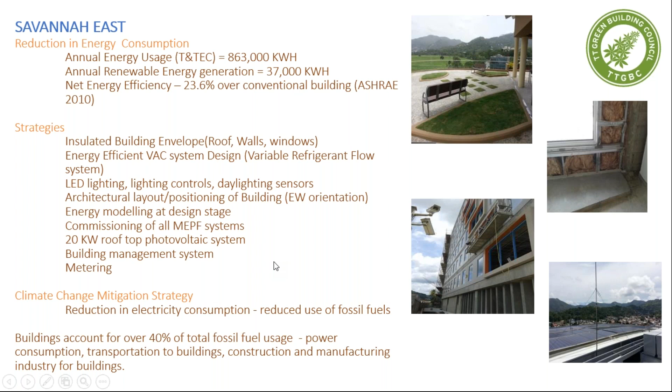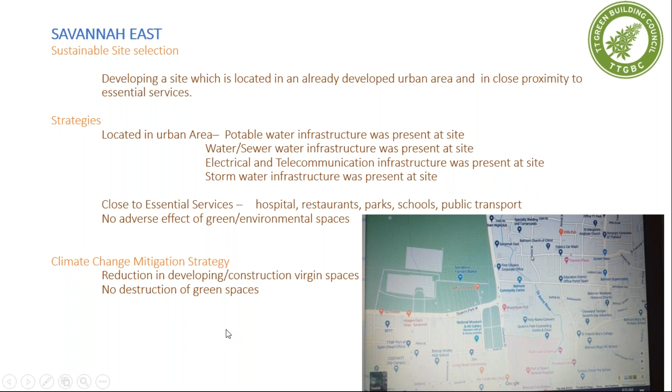That's a common misconception people have about green building.

I touched on transportation on the sustainable site. Savannah East is located in an urban area, in close proximity to existing transport systems. If you look at the map, you'll see how close Savannah East is to all the transportation hubs. There are actually bus stops on both sides of Savannah East, which facilitate easy access to the public transportation system.

We have preferred parking in the building, so people who carpool or have hybrid or electric vehicles park closer to the entrance of the building. You'll notice the parking that's above ground is open grid paving. There are also some car lifts, which encourage utilizing the building footprint without increasing gross square footage.

The climate change mitigation strategy again is a reduction in emissions associated with transportation.

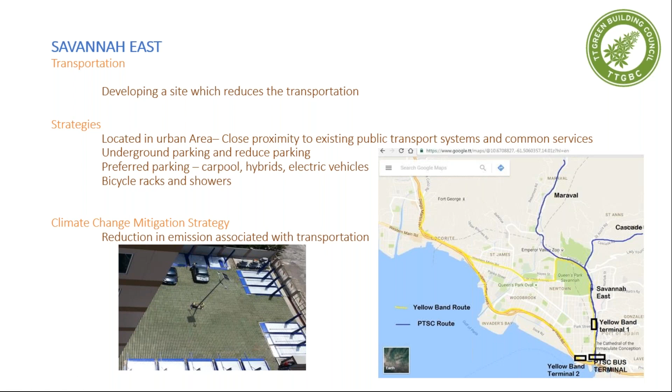On the building itself, we utilize sustainable materials and practice recycling. We source materials from sustainable sites, and we recycle construction material and building operation waste. Our strategy for sustainable material was to source wooden materials from FSC certified products. FSC certified is Forest Stewardship Council, which is basically certified sustainable forest. Sustainable forest means forest that is replanted every 15 years. The trees mature within 10 to 15 years, so after you remove the trees, you replant, and in 15 years' time you'll have mature trees to reap.

Regional materials were sourced, so the carbon footprint associated with imported materials was significantly reduced. Plenty of materials had recycled content. For example, steel usually has 70 to 90% recycled content. Wood, certain desks, and steel keys had recycled content in them. And during construction, we recycle. Again, I mentioned building operational waste.

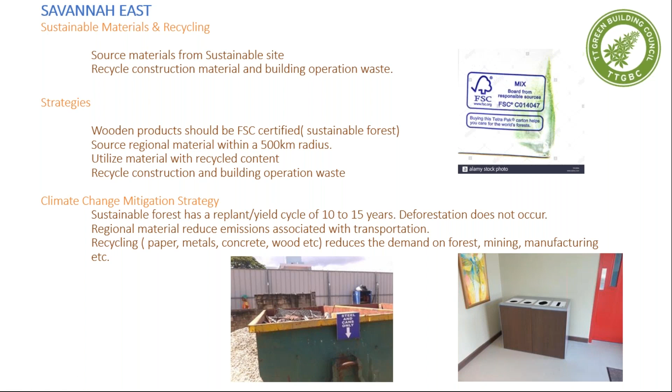Obviously, the climate change mitigation strategy is that with sustainable forest, which gives you mature plants in 15 years, and then you replant, deforestation on sustainable forests does not occur. With regional materials, we reduce emissions associated with transportation of materials to the site. Recycling during construction and operation of the building, with items such as paper, metals, concrete, and wood, reduces the demand on virgin forests, virgin landscape, mining, and the manufacturing of new materials. A lot of energy is associated with extraction and processing of raw materials and resources, so when you utilize sustainable materials, you reduce all the carbon footprint associated with those extractions.

So that's a brief on Savannah East, which is a green building in Trinidad, and the strategies that we utilized and how it contributes towards climate change mitigation.

So where are we in Trinidad? With regards to green buildings, there are two certified green buildings in Trinidad. One is Savannah East, which I gave a brief description of, and the next one is the NIB building, which is in fact maybe like four buildings before Savannah East. The state had issued some tenders for green buildings, but due to the status of the economy, none of the projects went forward to date.

But we must take note that a lot of buildings in Trinidad do utilize sustainable strategies with energy efficient equipment. They have a lot of daylighting sensors, and they utilize LEDs, which is pretty common with new construction. So although we don't have many certified green buildings, there are a lot of buildings that practice green strategies, and TTGBC applauds all those buildings for those strategies.

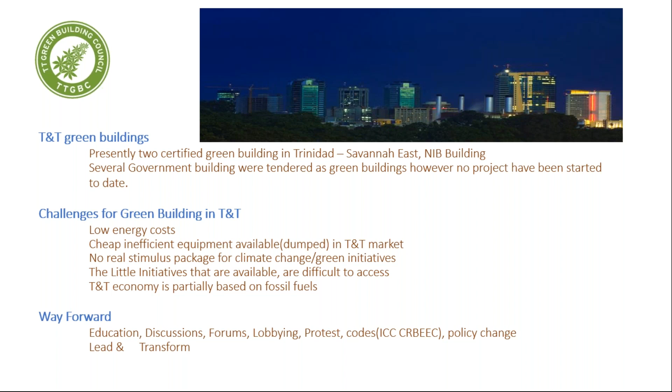What are the challenges for green building in Trinidad? We all know the low energy costs associated with provision of power in Trinidad. We have a lot of cheap, inefficient equipment in the Trinidad and Tobago market because it's not acceptable in the first world. In Trinidad, there's no real stimulus package for climate change or green initiatives, and the little initiatives that are available are very difficult to access.

A couple of years ago, a colleague of mine brought down a container filled with solar water heaters. However, customs was not up to date with the incentives. He spent two weeks on the port, accumulated a huge amount of storage fees, and he had to effectively reroute the container to Guyana in order to not lose more money.

The basic thing in Trinidad is that Trinidad's economy is based on fossil fuels, so it's kind of hard and difficult to move away from it. But the way forward is by reducing the demand for fossil fuels, and that's what green building does.

Once the demand is not there, and we seek alternative ways to fossil fuels, we will slowly get there in order to try to mitigate against climate change. The way forward is education, discussions, forums, lobbying, some protests,

following codes. I know my colleague, Ms. Andia, who's the next speaker, will mention the CARICOM Regional Energy Efficiency Building Code. They need some policy change in Trinidad, and what each and every one of us has to do is lead and try to transform society to think more about climate change and learn to do development that will have little or no effect on the environment.

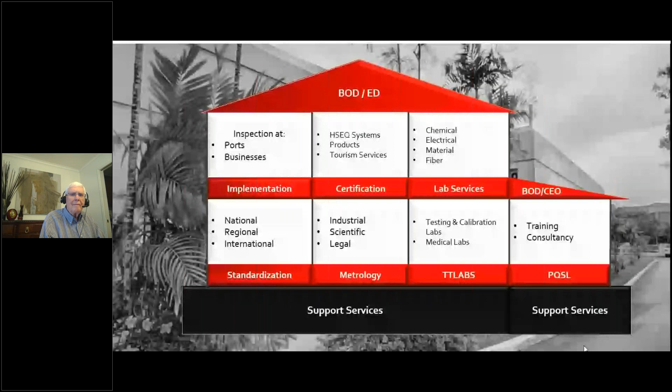Regionally, our counterpart is the CARICOM Regional Organization for Standards and Quality, CROSQ. This is what I like to consider sort of the UN of national standards bodies in the CARICOM region. Similarly to how TTBS is the national standards body of Trinidad and Tobago, each CARICOM member state also has a national standards body.

And what we do is come collectively at CROSQ to move forward regional standards and regional quality initiatives. This is held by CROSQ.

Okay, getting a bit of background, let's start to talk about standards. A standard, as defined by ISO, the International Organization for Standardization, is a document established by consensus, approved by a recognized body, that provides for common and repeated use rules, guidelines, and characteristics for products, materials, processes, services, or systems.

So it's important to note that standards can function for both tangible and intangible products. That's why we often say products and services are interchangeable for standards, because we're able to define requirements for both of them. Notably, one of the things you see is a document established by consensus.

So I have a colleague at the British Standards Institution, BSI, who often describes standards development as magic, because it's really an avenue where you have regulators, industry players, and consumer advocates all coming together collectively and deciding requirements, the minimum acceptable requirements for a product to make it safe and have minimum performance abilities.

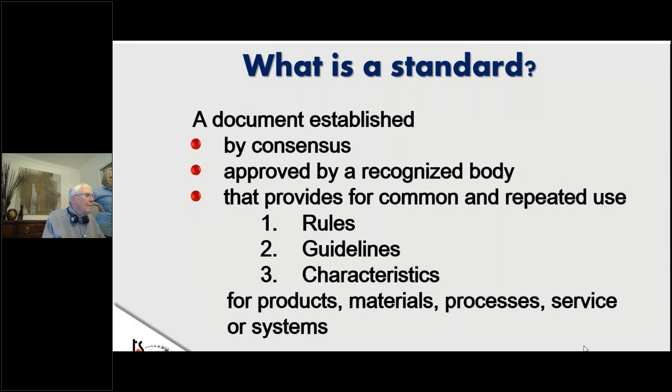In terms of when we say it's approved by a recognized body, for Trinidad and Tobago national standards, because the document can be referenced by legislation or contracts, our national standards has to be recognized by the Trinidad and Tobago Bureau of Standards or developed by us.

Per our legislation, there are two types of standards, voluntary and compulsory. Normally when I start to talk about this, the first question I always get is, well, why do you have voluntary standards? Nobody's going to follow it anyway. All standards should be compulsory.

I often link the argument to your kitchen sink. Most wives, or you probably get this from your mom, will tell you, wash the dishes. You grumble and go ahead and wash it. Then you tell her, okay, I washed it because you told me to wash it. And she will reply, I don't want you to wash it because I told you to. I want you to do it because you saw the dirty dishes and you wanted to wash it. It's a similar comparison here.

By applying standards voluntarily, it shows that the industry is maturing to recognize that there are minimum requirements for their products and they have voluntarily chosen to meet it. But at the same time, there's recognition that there are certain health and safety risks associated with products. In that case, the government and TTBS step in where we have compulsory or regulatory requirements.

Per the Standards Act, we are only allowed to make compulsory standards for products that can impact the health, safety of users, or the environment. But I do want to note that a voluntary standard can become enforceable if it's referenced in a contractual agreement between two companies, because then it becomes a legally binding document between these two organizations.

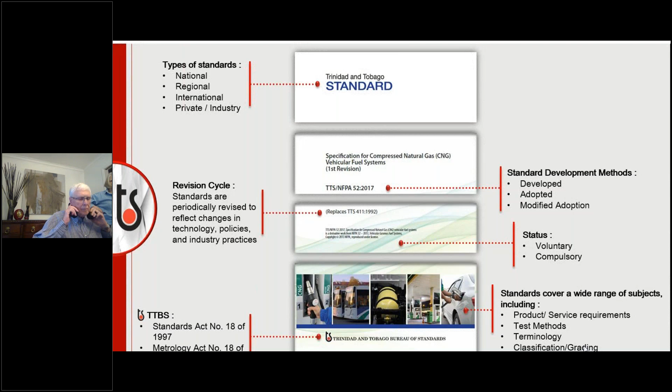With regards to the standards development process, it's very collaborative with stakeholders. Once a need has been identified, that there's a problem in the industry and maybe a standard might be able to address it, we identify the needs, stakeholders or ministries might contact us about the problem, and then we start to do some research via technical and market research. The first thing we look at is whether the standard is the solution to the problem, because sometimes we're not always the solution for the problem.

As well, we look at benchmarking internationally and regionally to see what exists there and probably how those problems have been resolved.

From there, if we make the decision to go ahead with a standard, we will prepare a working draft, and these are the committee managers at TTBS. Once there, we will establish what we call a specification committee, technical committees, or technical working groups. These persons, as I would have mentioned, are representative of regulators, ministry bodies, industry representatives, consumer advocates. It can also include learning institutions such as universities, like UWI and UTT.

And what we will do as a committee, we will go through the draft documents and interrogate it, see where it can work, where it doesn't work, and have these discussions to identify the requirements that make it suitable for Trinidad and Tobago.

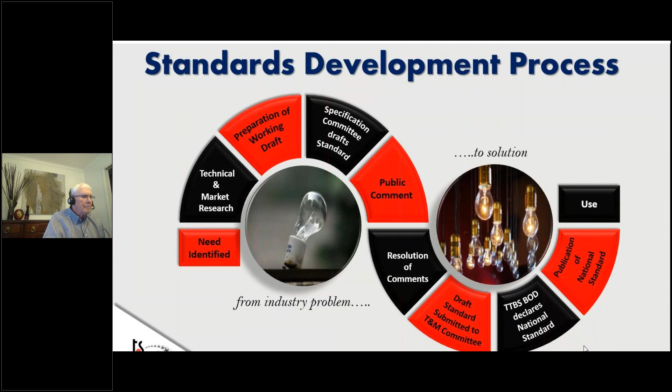Now, regarding sustainable energy and standards to support climate change, we have a number of existing national standards. So what you'll see is standards for renewable energy, interconnectivity, and transportation, supporting the entire system.

We have solar water heaters and interconnectivity standards for when T&TEC and RIC are able and willing to change the legislation - we have the standards there to support it. For transportation, as you would have seen, we have the CNG standard, and we are looking at working on standards right now for electric vehicles and electric vehicle charging stations.

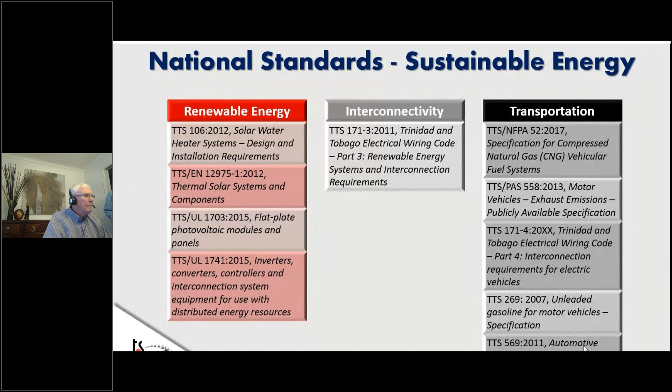So in our upcoming standards for the next 3 years, we have the national adoption of the CARICOM Regional Energy Efficiency Building Code. We are revising our compulsory standards on CFLs and LEDs. And as I mentioned, we are working on electric vehicles and charging stations.

In the coming years, there have been regional standards for energy efficiency labeling of LED light bulbs, refrigerators and appliances, and air conditioners, and we will be proceeding with the national adoption of these standards. Coming out of these adoptions, you will start to see a CARICOM regional energy efficiency label on these products. You might be familiar with the Energy Star on American appliances - well, soon you'll be seeing a CARICOM energy efficiency label.

And that means when you go as a consumer to the grocery or wherever to purchase these products, you can do a comparison to see which ones are more energy efficient, and it's for the requirements and conditions of Trinidad and Tobago. So if it says it's going to save you $100, it has been tested according to our conditions to ensure that yes, it is $100 TT that you're going to be saving.

And for the remaining standards for 2021 and 2022, it's the electric vehicles and auxiliary safety systems.

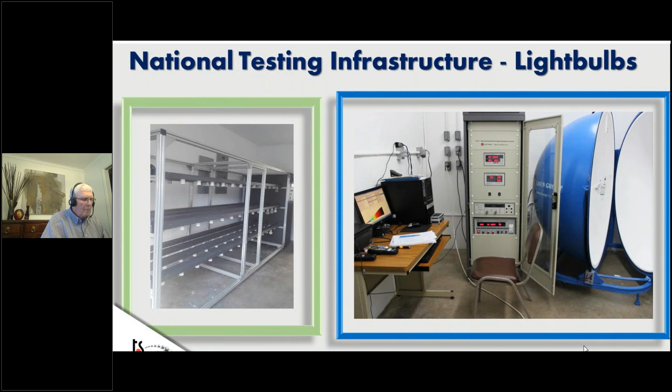If you want to check out more of our standards, feel free to check out our standards database, which is available on our website. It'll give you a full catalog of all the available national standards, and you can view it based on voluntary or compulsory, or by topic.

ASHRAE CARICOM has asked me to talk a little bit about the CARICOM Regional Energy Efficiency Building Code. As mentioned earlier, Mr. Devanand Ragbir, the previous speaker, served as chairman for our Regional Technical Working Group.

The CREEBC is what we like to consider the gold star of standards. It's internationally aligned because it's based on requirements of ICC, the International Code Council, International Energy Conservation Code 2018 edition. It's regionally developed because all the CARICOM member states came together to review that document and see how to make it more suitable for the CARICOM region, and it involves national collaboration, because as part of the regional development process, our TTBS and our stakeholders and technical working groups would have liaised to see where those proposed requirements can work for Trinidad and Tobago and where we need to make adjustments.

There is a view-only version of the document available. You can check it out on the website linked directly underneath the code, http://codes.iccsafe.org. So to give some background of the history of the CREEBC, CARICOM as a region recognized that we were particularly susceptible to fluctuating oil prices.

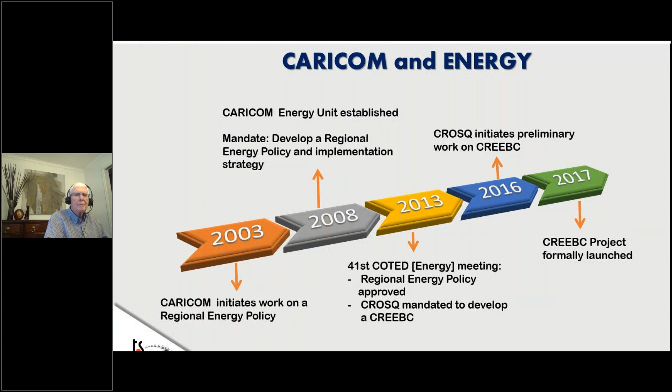At the 41st COTED meeting in 2013 - COTED being the Council for Trade and Economic Development - that would be all the ministers of energy for the various CARICOM member states meeting together and giving approval for the development of a regional energy efficiency building code. CROSQ, as our regional standards body, was given a mandate to ensure that this project took on. From there, the project formally launched in 2017, and by the end of 2018 we had completed the CREEBC, and it was published in 2019.

So the code itself is designed to be applicable to both residential and commercial buildings. And as you would expect, it looks at the entire building structure. So there are mechanical and electrical requirements, as well as requirements dealing with building material and construction practices, because all these things can add up to creating the reduction in the energy usage of a building.

As well as, most importantly, we like to consider the maintenance practices of it. Professor Kochar at UWI, when I was there, would always talk about the importance of building commissioning and maintenance, because the best designed systems over time will start to develop faults and not perform as designed. So maintenance helps us ensure that the building continues to perform as we expect it to, and is not starting to use more energy than it was designed for. We also have recommendations for construction inspection and approval systems.

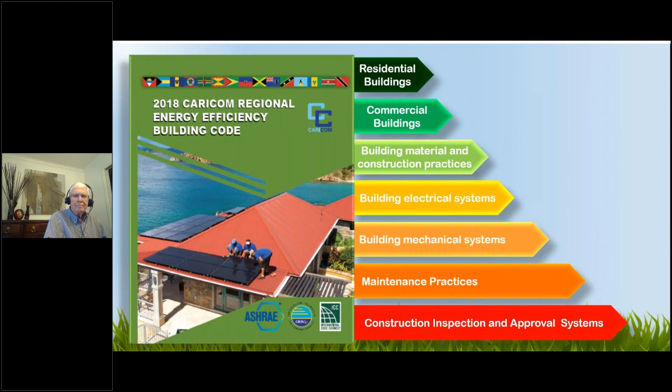So to give an idea of the code overview, as mentioned, we have requirements for commercial buildings and residential buildings, and as you can see, they sort of mirror one another. The CREEBC is scoped for new buildings. Or if you're going to do attachments to an existing building, the attachment can also fall under the scope of the CREEBC. There are some requirements for existing buildings if you want to look at that, but initially most of the codes will apply for new building infrastructures.

In designing the code, we would have looked at various options of compliance. For commercial buildings, there's a prescriptive approach - throughout the codes, certain requirements would have been identified as mandatory, and if you fulfill all those requirements, you've taken the prescriptive route. Another route would say if you are compliant with ASHRAE 90.1, you're considered to meet the requirements of the CREEBC. The third option is performance, where your annual energy cost is lower than the reference design.

Similarly, for residential buildings, there's a prescriptive and performance approach. What we would have introduced is tropical buildings.

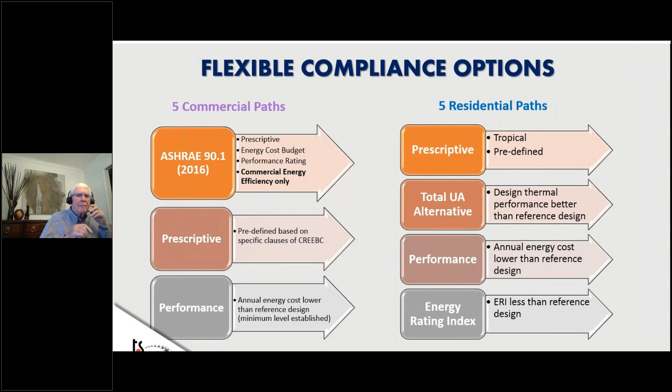So this was one of the major changes we would have made in developing the CREEBC, which would have been given considerations for the design of buildings in the Caribbean, such as ventilation. If your building does not have AC throughout it and there's certain ventilation to allow for it, it would be considered to have complied with the CREEBC. Okay, but we're not just stopping there.

Because codes can be very complex and difficult to understand, we are having discussions with ICC to produce supporting documents. So we have user guides and study companions to ensure that manufacturers or installers fully understand the requirements of the document and can use it going forward.

Regarding nationally, with the publication of the CREEBC, we will now start the national adoption. We've established a technical working group to look back at the code itself and make sure there's any tweaks we need to make it suitable for Trinidad and Tobago. We're lucky enough to have most of the representatives who would have participated in the regional project also willing to participate for the national adoption.

We are currently identifying the modifications to make for Trinidad and Tobago, and we expect to finish this in about the next 1 to 2 meetings. From there, it will be issued for public comment for a period of 60 days.

So if you are interested in learning anything more about standards, or to see any of the standards we have issued for public comment, you can visit us on our website or check us out on any of our social media pages. Especially with COVID-19, we've got some infographics out about some of the requirements to look for on the labeling of products, particularly disinfectants, to make sure what you're buying is something that's going to perform as you intended. Okay, so thank you everyone, that's my presentation.

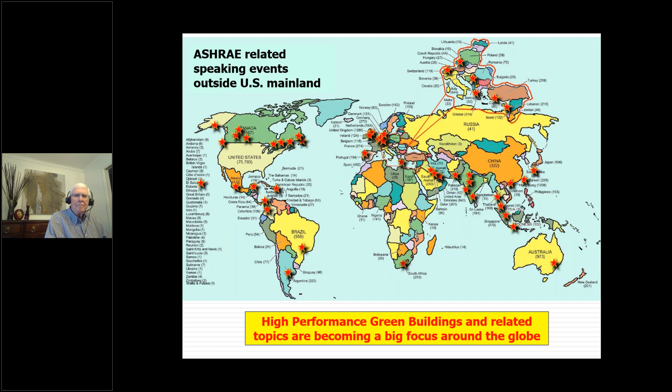So I want to spend a few minutes now going through and talking about ASHRAE's climate change position document. See the web link on there - I don't think we have time to go to that point, but you can Google it and find it very quickly. It's not terribly long, somewhere in the 10-12 page length time frame. Position documents that ASHRAE produces are what ASHRAE as a society says our position should be, especially relative to items or topics related to HVAC and our topics. So here's some key point summary of what's contained in that position document.

We recognize that our industry, the HVAC and refrigeration industry, contributes to greenhouse gas emissions directly through refrigerants released in the process of manufacturing and operation of equipment, and also, probably more relatable, indirectly through the CO2 emissions associated with energy consumption - primarily electrical, but it could also be combustion of natural gas or something like that for producing energy used in building systems. So ASHRAE does have a potential for a significant contribution to mitigate and adapt there. Roughly 20% of the total societal emissions of CO2 is through HVAC systems connected with buildings, so we are heavily involved in that. ASHRAE is taking a leadership role in the response to climate change and how we adapt to that.

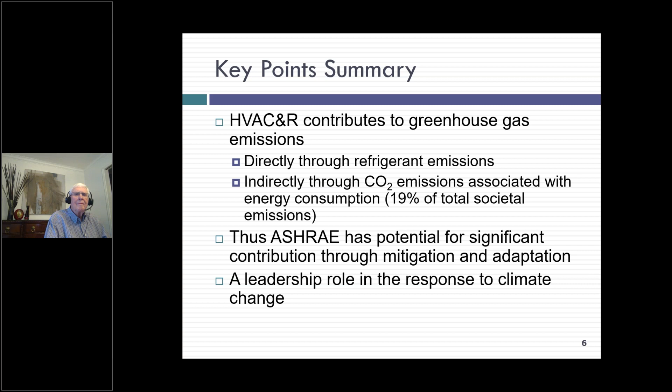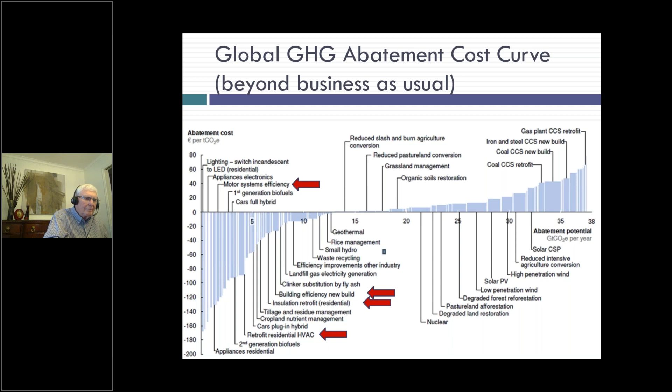Some of the things we talk about are contained in the position document, although this particular chart wasn't produced by ASHRAE. The vertical axis is basically the cost in terms of euros per ton equivalent of carbon to mitigate a CO2 emission. Some of the things on there basically pay for themselves - switching over to LED lighting is a no-brainer. I'm pointing out a few things here with arrows that are directly related to HVAC systems and building energy efficiency - retrofit in residential HVAC, efficient motors, all those. The good thing is every one of those items would pay for itself, really, so that's something we should do. The only impediment is maybe the first cost, and maybe just a lack of information people might have about what this can actually contribute toward.

Some of ASHRAE's response to climate change - we've been producing advanced energy design guides for 15 plus years or so now. Those are guidelines on how you could design a building of a specific type in specific climate zones, or for your climate zone, to be more energy efficient. We started with like 30% savings, then 50%, and now ASHRAE is actually working on some net zero type buildings for certain building types, which is really interesting. Going through that, if you follow it, at least it gives you some guidelines. It's not a standard like we described before, just suggestions on things that should be considered.

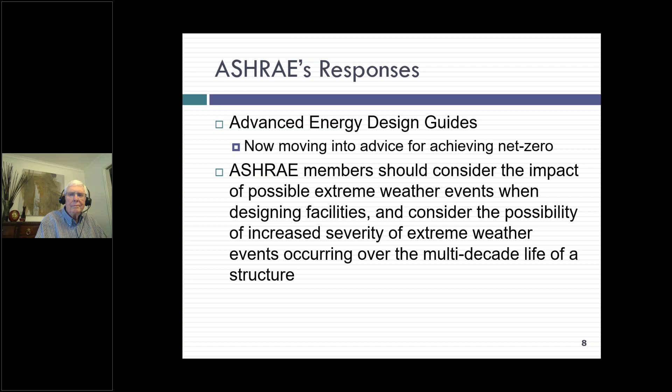Also, ASHRAE should consider the impact of extreme weather events and changing climates. When doing the design of a building now, it's going to be there for multiple decades, and so we should look at what the future might be in terms of the climatic considerations we have to work with. ASHRAE's position is that climate change is considered probably the most challenging issue facing society right now, regardless of what we're dealing with in terms of health concerns. Over the long term, that still is the most challenge.

We have a lot of opportunities that exist for our members to help mitigate that in terms of refrigerant selection, doing demand reduction, energy efficiency measures, and then also looking at adapting and adopting renewable energy into our building projects. So changing climate also means a changing design in what we're looking for - we have to future-proof our particular designs. And the members of ASHRAE and ASHRAE staff should be actively involved in helping to have some influence on policy setting to address these issues.

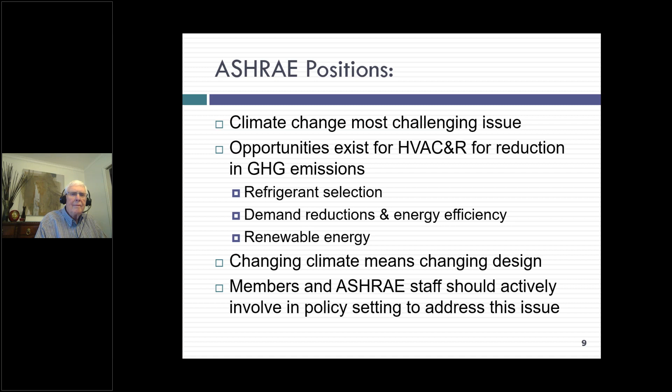The previous speaker was talking about setting policies that are reflected in the standards being put out. ASHRAE is committed to helping develop solutions toward this. They're doing a lot of collaboration with other societies and organizations, promoting use of life cycle evaluation of designs and products, informing designers, people and students, and educating building owners on proper operation techniques to maintain these things over the overall life cycle. And working on the idea of resilience within there. We're participating with the Resilience Building Coalition and their international efforts, because we're all in this together. And besides just climate change, we have to have resilient structures to take us through that.

So that was a real quick summary of looking at what we have in terms of ASHRAE's position document there. I want to go through now a brief overview of generalizations of what we might call high performance building design. When I talk about this, many times when I go through and talk to other chapters like this, you always have to, if you're talking about a term, define what it means.

I thought about this about 7 or 8 years ago. I went through, if you said the term high performance building, asked people about it, what does it mean? Well, probably the first thing everybody would come up with is low energy consumption, or nearly net zero - that's a high performance building. But also low water consumption. Even if we're in areas that have lots of water resources, it still takes a lot of energy to produce and deliver water.

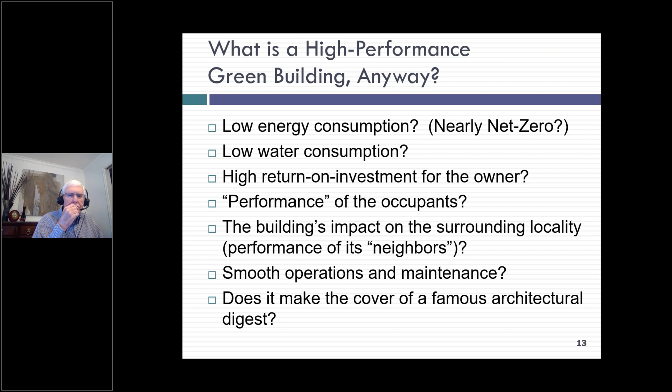So all of those right here, if you put them together, all those combined are really what would define a high performance building. And I would contend that it is possible to have all of those at the same time. They are not mutually exclusive going about this.

I had a friend of mine, several years ago, we were sitting at one of the ASHRAE annual or winter meetings, we were just talking, and he says this: sustainability is not sustainable unless it's cost competitive. And I thought that was kind of profound, meaning we're not going to see widespread adoption of these ideas until it becomes the point where people would be willing to invest in it. Cost competitive doesn't necessarily mean the lowest first cost, but it has to be something where the owner or the person in charge of the project says, I would be willing to invest this amount of money in this particular part of the design because I know over the long term it's going to pay off for us. So that's what I mean by cost competitive.

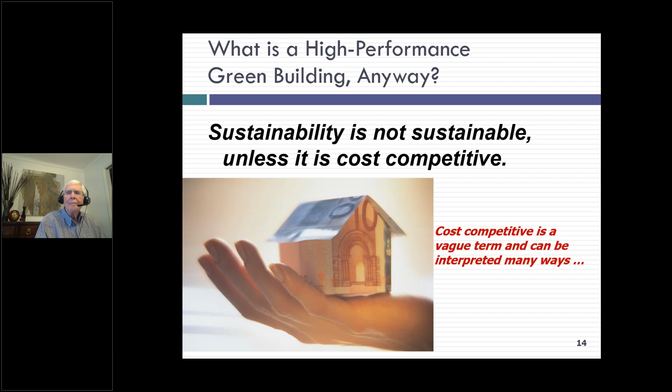And we always have to keep that in mind when we go about this. You can't just go for the highest performance you can get, the best you can get, because sometimes they may not be willing to invest in that. Now we have different scales of performance of buildings, particularly thinking from an energy perspective, but it could also involve other things. We have building codes, we have minimum code performance, and some people think that designing to code is good enough. But really, we're trying to go toward high performance building. There are some that push to do the best of the best.

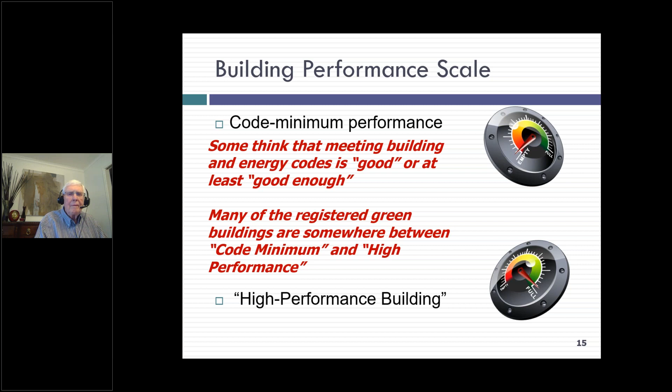In reality, most green buildings that are certified according to LEED or other types of programs are somewhere in between going about this. Green building practices have evolved over the years. We have different levels, starting with guidelines, which are suggestions on how we can improve things, but they're not necessarily enforceable or enforced.

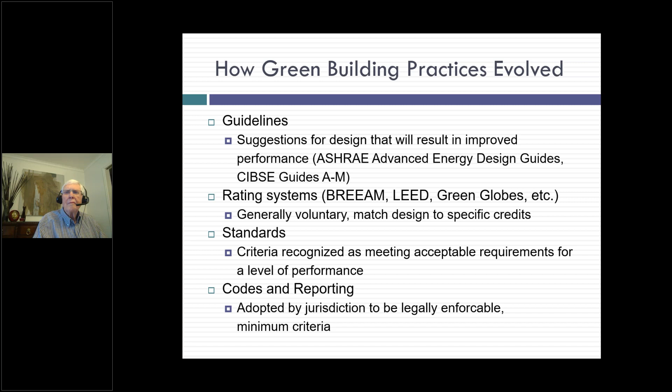We have rating systems, like LEED, Green Globes, or BREEAM, depending on where you're at. They're generally voluntary, though in some cases they're used to enforce building codes, but they're a step above the guidelines. Then we get into standards, which are documents written such that they can be legally enforced, put into building codes at the lowest level down, where it's actually adopted by a jurisdiction. It's meant to be enforced, with minimum criteria the building has to meet.

When we go through and look at working towards energy efficiency, I like to call it the 4 R's for going about this. Some who have been around the industry for a while have heard this before, but it never hurts to see this again and remind ourselves.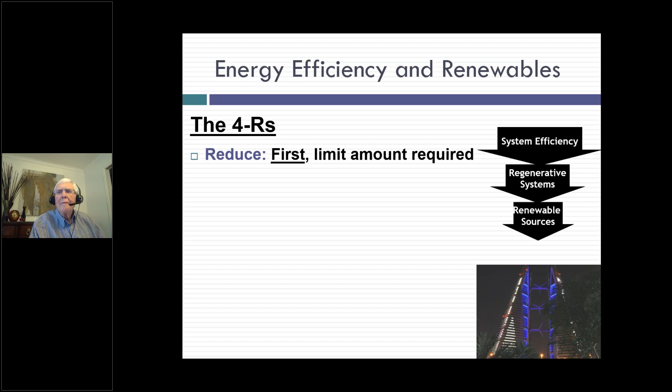The first thing to do, the most efficient way of investing money in a design of a building, is reducing the amount of energy or water required through efficiency measures. Then look for ways of potentially reusing energy, like energy recovery ventilation or similar systems. Only then is it worthwhile looking at renewables. These are really the three orders of going about this. You can have much more effective use of an investment of a dollar in reducing energy consumption through efficiency than you might have in investing it in renewable energy.

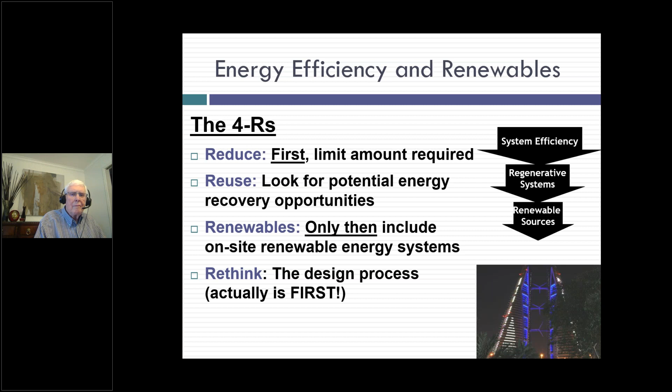So all of this, putting it together, involves a rethinking of the design process. Actually, that probably should be the first thing, but that's all part behind the scenes of what we're going towards. So the next thing I want to do is go through a brief discussion of how you might design to achieve net zero.

These are the wedges aspects, some of which people might have seen similar to this for carbon emissions. The first one you'd want to look at is the building envelope, because the building envelope is basically going to be there the whole time the building exists. We can have equipment and systems that you can change out as technology changes and gets more efficient, but the building envelope, the windows, the insulation, that's there forever.

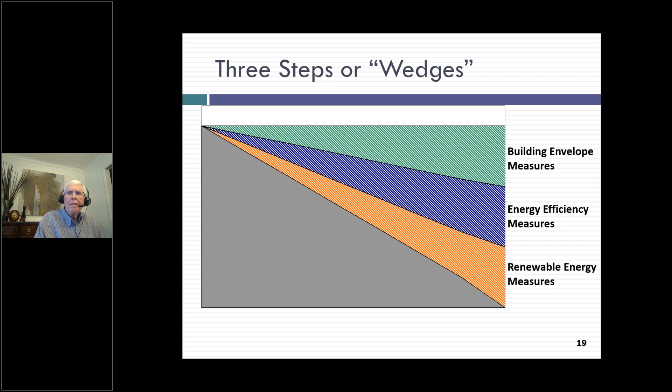And then energy efficiency measures, and then look into renewables. In some ways, this is just a continuation of what we had from the previous slides.

So some common characteristics of net zero energy buildings as they exist around the world: efficient ventilation systems are important, and ventilation is important both for energy efficiency and as a function of getting good indoor air quality. If you look at a high performance building, it gives you both of these aspects.

Then look for methods of doing energy recovery, like preheating or pre-cooling of air coming into the building, or similar systems. A ventilation energy recovery system is a good opportunity, particularly for types of buildings that have a lot of outdoor air requirements.

Having good solar or renewable resources available to us—again, these are common characteristics of buildings that have actually achieved net zero in their overall operation. There are a number of buildings existing around the world that have actually made it to that level. Net zero means they're generating on site as much energy over the annual basis as they're actually consuming.

In some cases, you need some occupant buy-in. There might be a building where you're trying to take advantage of natural ventilation when the outdoor ambient conditions are appropriate, where you can open up the windows and just get natural ventilation as opposed to mechanical ventilation.

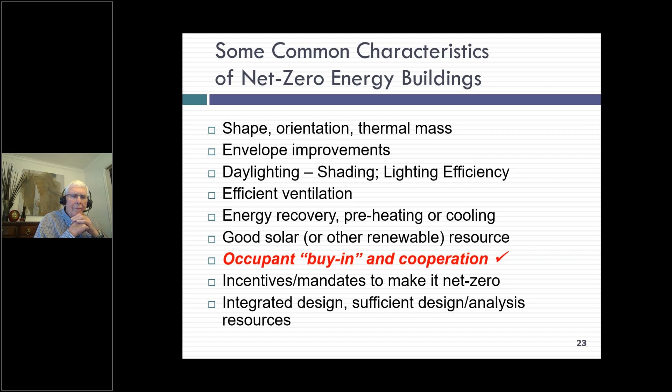And also, in some cases that have been toward net zero, there have been local mandates or at least incentives to make them net zero. And all these put together to make a net zero building really requires an integrated design process.

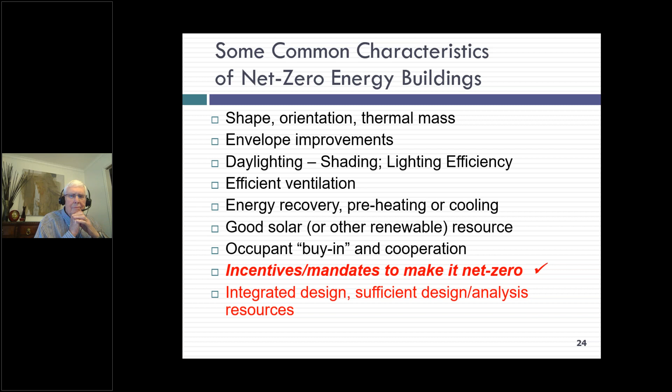Some of the future things we see coming down, we just talked about integrated design. It's not exactly mainstream yet, but that's the only way you're going to get a high performance building, I think. Integrated design meaning the whole team is working together.

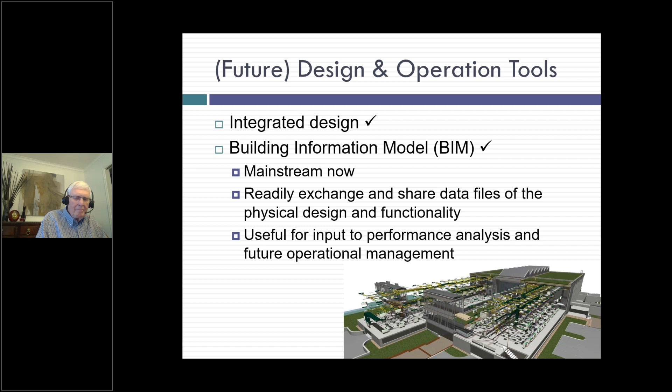But then building information modeling, or BIM, there are products out there, software tools that basically exchange information back and forth. It's funny, BIM was always talked about as being like 3 years away for about 20 years, and then pretty well it's here now. It's mainstream. I'm talking with some people that work in industry, and pretty much almost all their projects have now gone into using BIM.

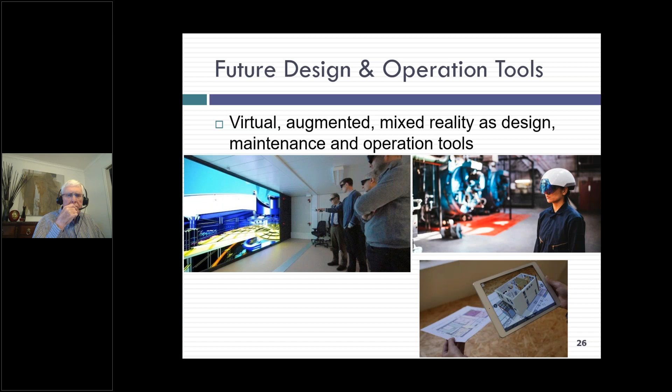Now some of the future things we're looking at here, this is kind of the cool stuff: virtual reality, augmented reality, mixed reality as a design process, and also doing it for maintenance operations, being able to visualize a building before it's actually built. More than just seeing it on a CAD screen, or even a 3D model using BIM, being able to look at it from a virtual reality aspect gives another sense of dimension to the overall design, and you can actually get good collaboration and end up with something worthwhile.

Now, a few other areas I just want to comment on, some things I see are important to work towards. One of them is the idea of a smart grid and smart buildings and how we're working towards that. We have this grand challenge of trying to take the electrical grid we have and turn it into a smart grid.

Now, the utilities have done a pretty good job so far. That's their business, you'd expect them working towards a smart grid. They've done a pretty decent job overall around the world of integrating renewable energy within their electric supply network. But where work is still needed is basically in the industry ASHRAE is involved with, the built environment, the buildings, and all the stuff inside there.

You have electric vehicle charging stations. You're even getting to the point where a pump or an air handling unit might actually be grid connected and able to communicate back and forth. We're getting there, but that's where I think a lot of work is being put.

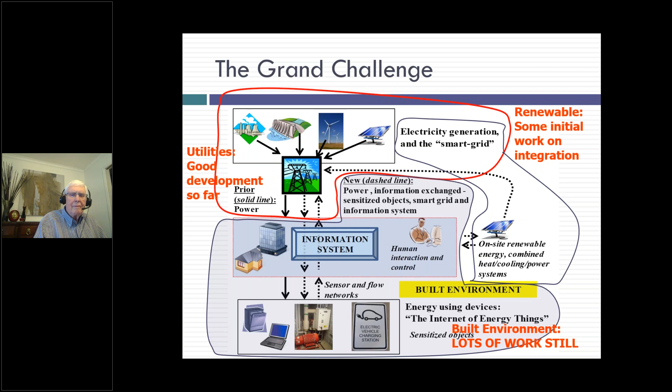Now, one thing that's really important to work towards is the idea of model predictive control. Model predictive control could apply to an individual piece of equipment, to a building, or to an entire campus of buildings, like my university campus. I was just reading an article in ASHRAE's newsletter that came out today, looking at model predictive control of a particular building and how it was used to make it much more energy efficient.

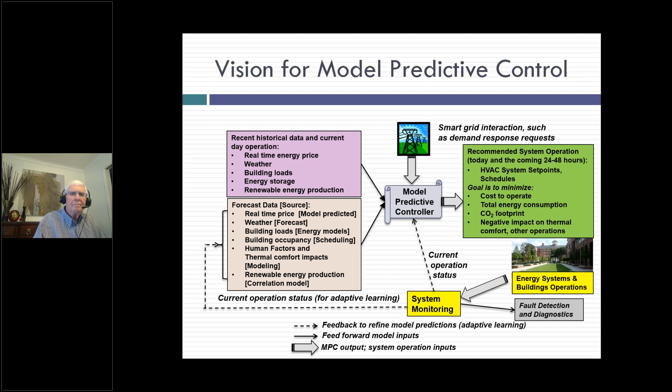We don't have time to get into that too much, but I would encourage you, if you really like that kind of modeling, just Google that term. That's beginning to become more and more prevalent within industry usage.

So we go from a smart grid, the original idea where some parts are connected, some parts exchanging information. We're evolving into maybe a second generation version of that, where it's more widespread connection and connectivity. And as we go on, you can actually envision the point where everything is connected, all the equipment, all the buildings, the equipment inside the buildings working together.

We could even get to the point where you have a neural grid, or a self-healing network, where a building senses something's gone down, a problem occurred in the electric grid nearby, and is able to help, take care of it, and route around it. So that's something that is potentially coming down the line.

Now, the last little topic I want to talk about: how do we have a healthy building with low energy? That still gets at this idea of low or good indoor air quality.

We need to future-proof our building design, going about this talking about climate change and how that fits in.

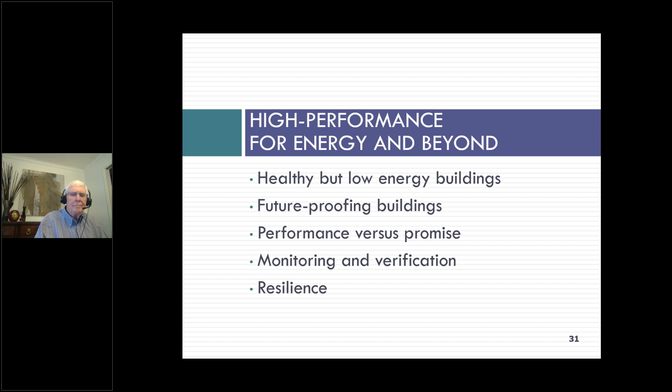We need to be able to verify the performance, compare that to the promise of the overall design.

And then resilience. Resilience, I think, is an important term coming about, becoming more important within ASHRAE and the industry.

How do we go about this? So what is resilience? In this context, it's the capacity of individuals, communities, businesses, buildings, or cities to survive both chronic stresses and acute shocks.

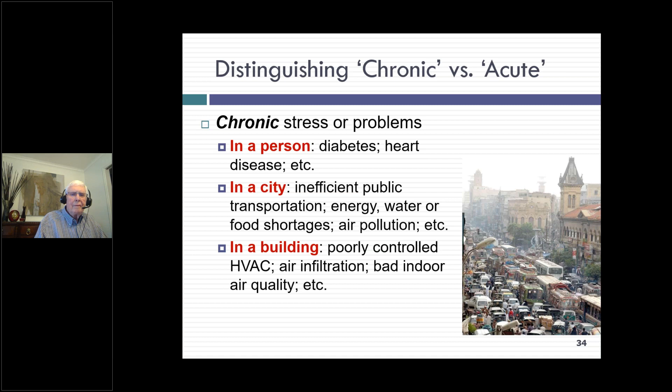So chronic stress, on a person, would be a disease like heart disease or diabetes. In a city, it might be inefficient public transport. And in a building, chronic things are poorly controlled HVAC, bad indoor air quality, air infiltration and air leakage.

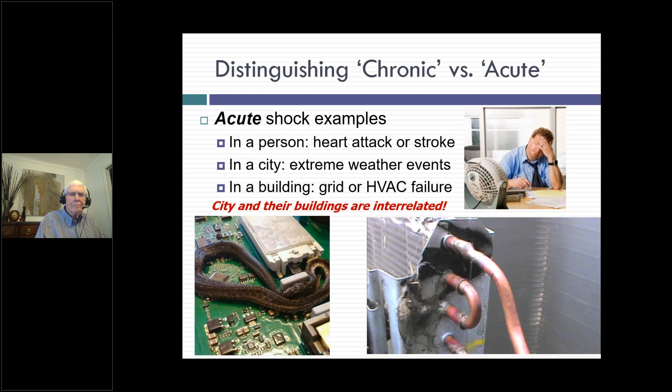Then acute things occur - in a person with heart disease, that's a heart attack. In a city, an acute thing would be an extreme weather event like a hurricane. And in a building, maybe the grid goes down or the HVAC chiller fails - there's an acute shock that has to be dealt with.

Well, I hope that was able to help people understand and see what this is about. I realize it was pretty fast, but I hope you took a few things away from that.

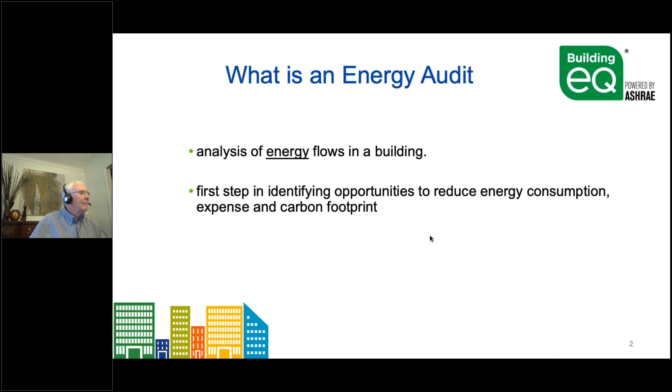I'm not able to change the slides. Omar? Hello? Hi, David, you're on - let me know if you got access. The slides are not... there we go. Okay, I think we're going now. Give me a second, I'm going to have to ask you to change the slides. Okay, I just gave you my keyboard and mouse, so yeah. Okay, cool, perfect, try again. Try again. No, not going. Where? Next slide, please. Okay.

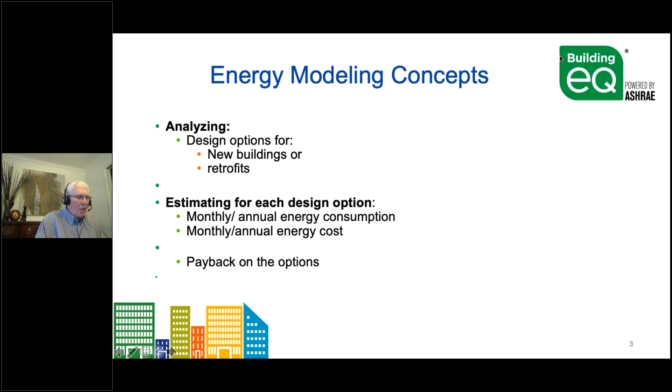Energy modeling includes analyzing design options for new buildings or retrofits of existing buildings. It gives estimates for each design option of monthly and annual energy consumption, monthly and annual energy costs, and payback on these options. Next slide, please.

ASHRAE's Building Energy Quotient program provides an energy analysis that compares your building to others in the same climate zone. The two complementary options are in-operation, which compares actual building energy use to similar buildings, and as-designed, which compares potential building energy use to similar buildings.

The Building EQ can help identify means to improve your building's energy performance and data for indoor environmental quality. This presentation provides details on how to use the Building EQ program as part of new building design, and how to manage actual building energy consumption, which is very important because most of our buildings are already built.

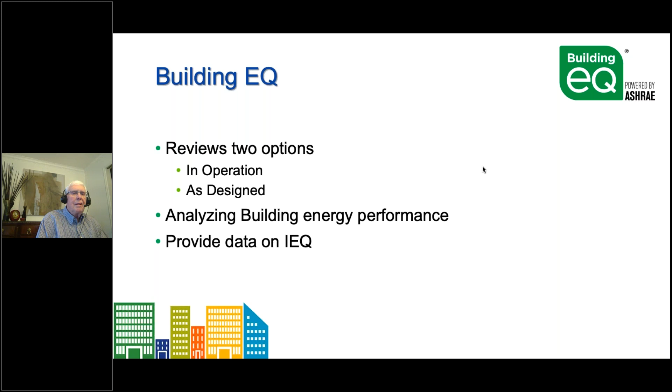Building EQ is powered by ASHRAE and rests on ASHRAE methodologies, standards, and the experience of credentialed practitioners. The Building EQ provides the most comprehensive assessment program in our industry and gives reliable, consistent results.

The benefits of the program include helping building owners make informed decisions about managing their building portfolios, and assisting in the preparation of an ASHRAE Level 1 energy audit. The Building EQ identifies actionable recommendations, provides a credentialed practitioner with a consistent methodology, and provides the building owner with clear information.

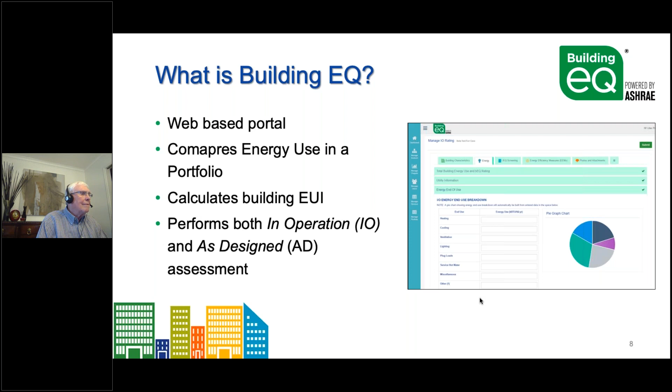The Building EQ operation process compares metered energy use to a baseline median energy use intensity. Twelve consecutive months of actual meter data is required, and must be within six months of the assessment date. Metered energy data can be downloaded from Energy Star Portfolio Manager, so the data does not need to be re-entered into the portal.

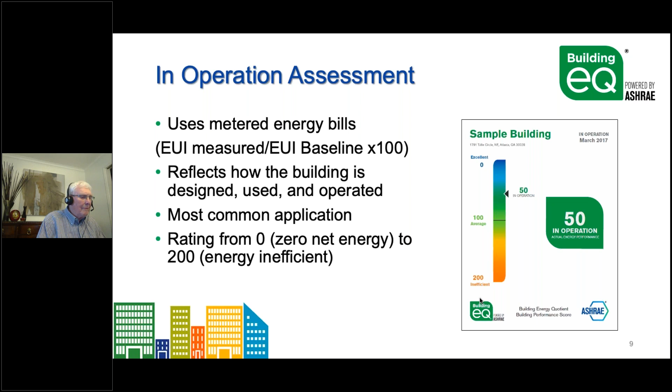Building EQ in-operation assesses the building's energy performance by collecting metered energy data, including a building walkthrough, supporting a Level 1 ASHRAE energy audit, identifying where and how energy is consumed, providing suggested energy efficiency measures with estimated costs and payback, and includes an indoor environmental screening that records measurements for thermal comfort, lighting, and ventilation for IAQ, providing a Building EQ performance score.

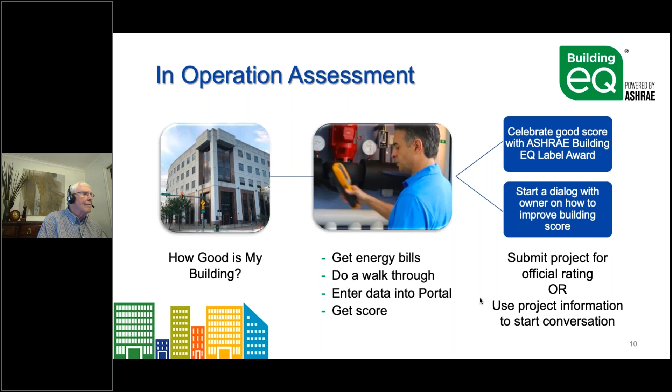The assessor gets information that will help the building owner. The building owner receives guidance on how to improve energy performance. The Building EQ in-operation process compares metered energy use to a baseline median.

The Building EQ as-designed compares a building's simulated energy consumption to a baseline EUI. It utilizes a standardized model of the building being evaluated, using standardized inputs of operating parameters, including occupancy, plug-in process loads, schedules, and set points dependent on the building and space type. Because most green building programs don't normalize for operating and occupancy variables in their new construction ratings, it is difficult to compare buildings with very different operation and occupancy to each other. The Building EQ as-designed rating allows for this comparison because it standardizes those operating variables.

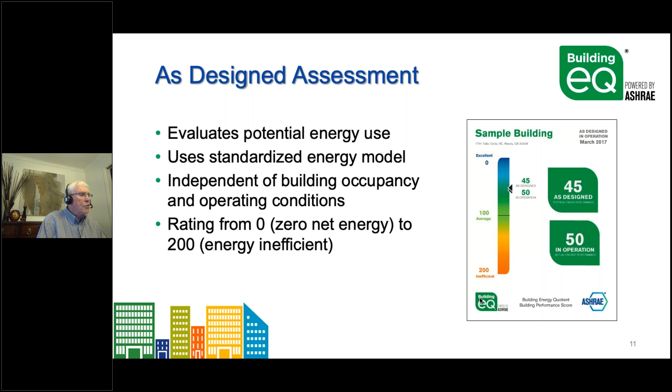The scale barometer shown illustrates building performance score again, as follows: a zero net energy building will have a score of 0, an efficient building has a score less than 100, an average building will fall near the median value of 100, and an inefficient building has a score greater than 100.

These are the standardized modeling inputs specified in the Building EQ Worksheet tab. I'll give you a moment to take a look at them.

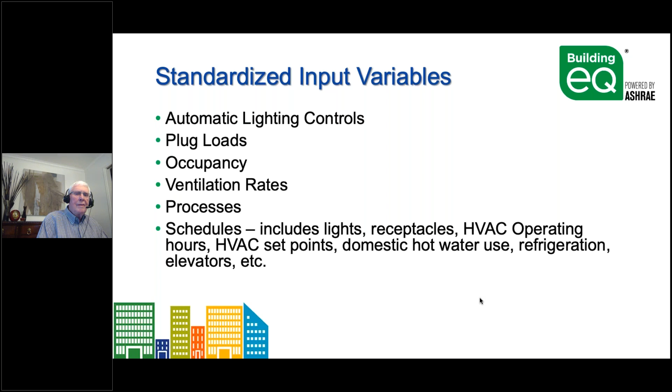Modeling inputs are specific to the candidate building. These inputs need to be consistent with as-built conditions. I'll give you a moment to take a look at these items.

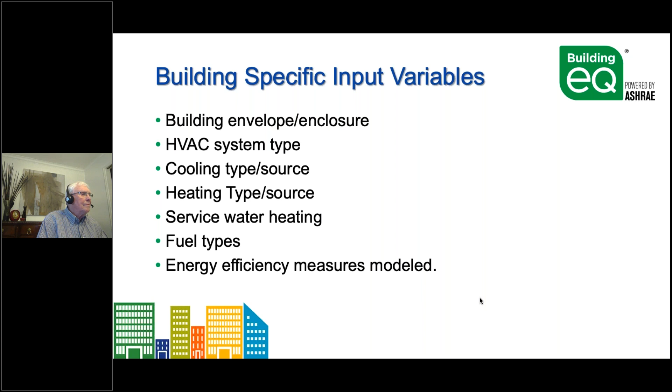The as-designed process involves an on-site visit by a building energy modeling professional, known as a BEMP, to confirm that the modeling inputs are consistent with the building as constructed. The process models the building using standardized operating assumptions and modeling inputs, calculates the rating using data generated from the model, allows for comparison of buildings with different operating parameters, and allows for comparisons of a building's current energy efficiency to its potential energy efficiency.

The owner is able to compare different buildings without including effects of the current occupants. The operator is able to determine whether they are achieving the full design potential for their buildings. The as-designed rating may be a useful tool for real estate transactions.

The as-designed rating can be used on new buildings that have not yet been operational for a full 12 months, as well as on existing buildings that have been operating for a long time. The as-designed process can also be applied during the design phase of construction or to evaluate different design options. Because the as-designed rating is neutralized for occupancy and operating conditions, design options can be compared solely based on how the building assets like bricks, mortar, and systems are expected to perform.

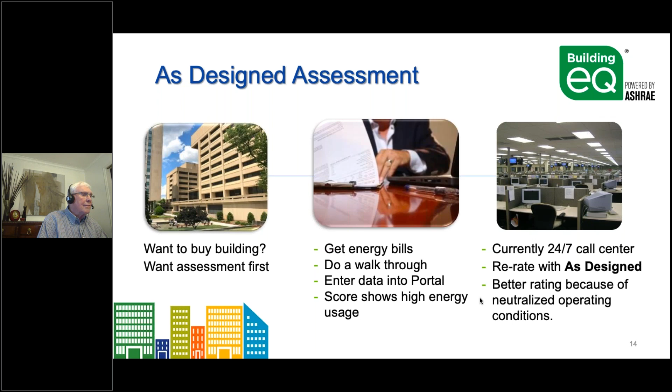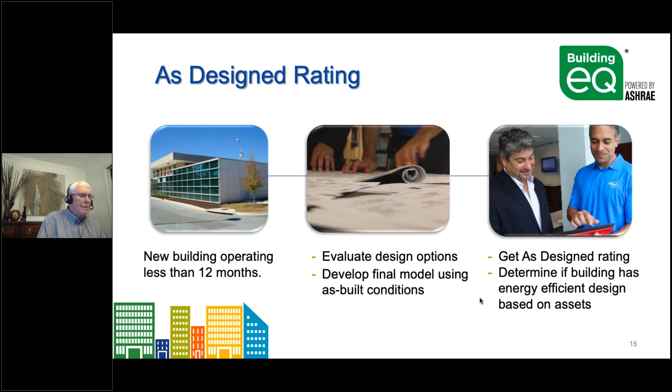Information on state and local ratings in the United States and Canada is available from the Building Rating website, supported by the Institute for Market Transformation. Other websites including this kind of information are the EPA Energy Star, the Department of Energy or DOE Asset Score, the US GBC LEED Program, Green Globes, and BOMA 360.

The European Union requirements for each country are under a directive of the European Parliament. Member states are obliged to ensure that when buildings are constructed, sold, or rented, an energy certificate is made available by the owner to the tenant or potential buyer. The certificate shall also include information on how to improve energy performance.

I seem to have somebody else in the background.

It concerns such elements as building envelope, windows, electrical and ventilation installations, lighting, heat sources, which is not too important for people in Trinidad, I'm sure, cooling systems and others. However, I am from Canada, so heating is important to us.

Certain buildings over 500 square meters are also required to have an energy certificate on public display. This can be for an asset rating or an operational rating of the building.

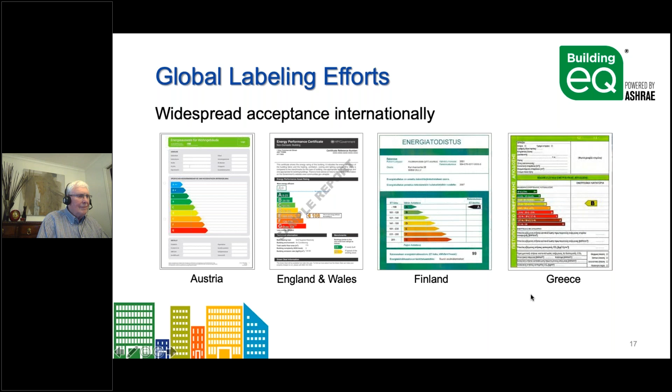Building EQ allows for the comparison of a building's actual energy use to a building's potential energy use. Both Building EQ and Energy Star benchmark your building against a baseline of other similar buildings. Building EQ is a statistical scale that compares the building score to a baseline median score. Energy Star is a pass-fail system that uses a percentile scale, where a score of 75 means the building is better than 75% of other similar buildings.

The Building EQ assessment assists with the preparation of an ASHRAE Level 1 energy audit to identify improvements for the building. These actionable recommendations are generated by a credentialed professional with a site visit and recorded measurements. In contrast, the U.S. Department of Energy Asset Score has no credential requirements. The tool automatically generates building improvement suggestions, which makes the quality of the suggestions somewhat uncertain.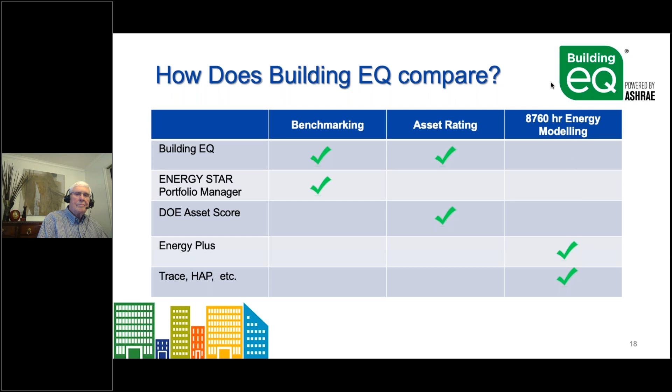The Building EQ portal is a tool that includes online data entry, and this is the heart of the Building EQ information input. The Building EQ performance score rates the building's performance and is free to all users. The portal gives the Building EQ performance score, which shows on the screen once the required data is entered.

Projects must be submitted by a credentialed practitioner for an official Building EQ rating. A credentialed practitioner signs off on the project by agreeing to the terms and conditions and signing off on the project detail screen. Credentialed users include ASHRAE Building Energy Assessment Professionals, or BEAPs, ASHRAE Building Energy Management Professionals, or BEMPs, or a professional engineer located in the area of the project.

The Building EQ portal allows you to group the projects in your account into campuses and portfolios. You can use these two designations to organize and group your projects.

The Copy Project feature creates a new project with the exact same information as the original file. The new file is automatically created with Copy 1 added to the end of the original file name. The new project can be renamed and edited as needed.

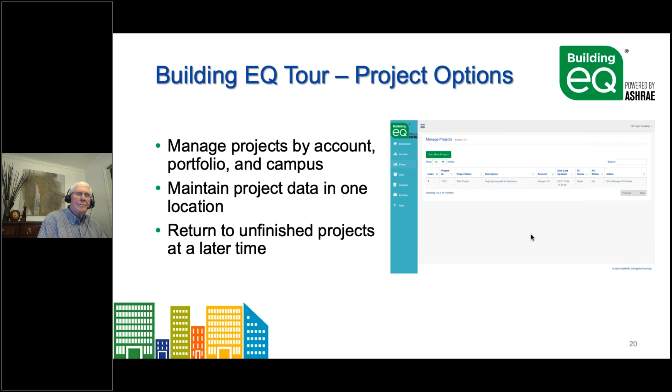The metrics, currency type, and rating type are selected from the Manage Project page. The climate zone is selected on the data input screen, which is great for ASHRAE's international situation. We have languages of English, French, or Spanish, selected for the user on the user setup page, so different languages are available for the program.

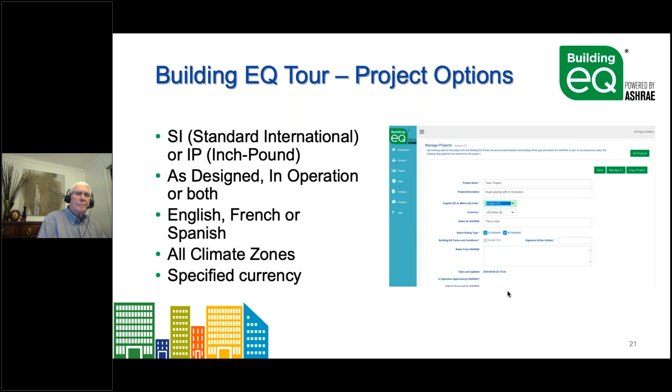The data input screens are arranged by tabs and accordions. The tabs—building characteristics, energy, indoor environmental quality screening, energy efficiency measures, and photos and attachments—are organized horizontally across the screen. Each tab has multiple accordions below it vertically that open and close. A green check mark on the accordion indicates that all the required data for that accordion has been successfully entered and saved.

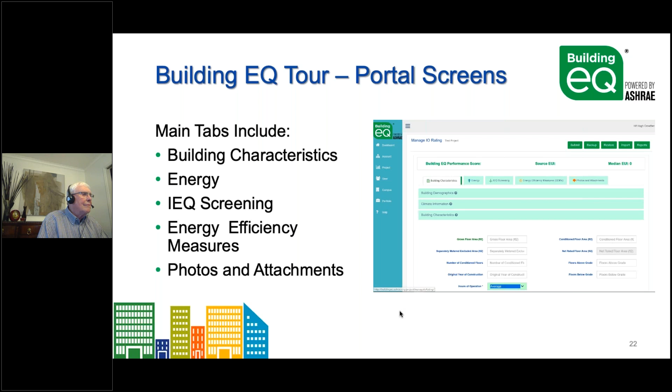The Building EQ portal uses several different symbols to communicate the validation status of your project. The question mark indicates there is a help screen associated with the field or tab that will provide specific guidance relative to that field or tab. The yellow triangle is a validation warning that signals an entered value is outside the normally expected parameters for that field. A message will appear in yellow text at the top of the accordion to let you know what specific field is triggering this warning. The warning allows you to verify that you have entered the information correctly.

Validation warnings will not prevent you from submitting your project for approval. A red X mark signifies a validation error, indicating that either information is missing or that an entered value is invalid. A project cannot be submitted for approval until all validation errors have been addressed.

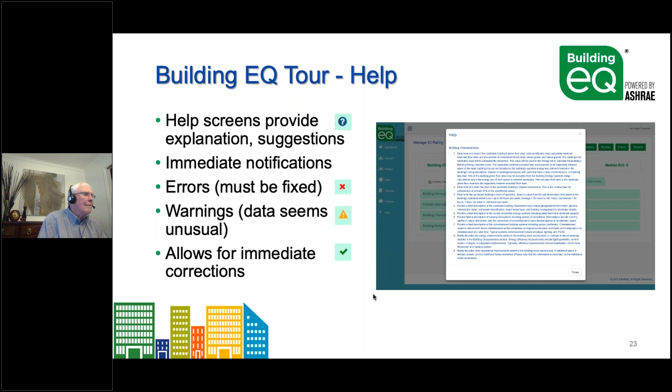Available building types are noted in the pull-down menus. They are listed by broad activities and broken down into more specific building types, matching your building's main use activities with the broader categories and then more specifically within the subcategories. A multiple use building contains different principal activities in a single building. Similarly, a multiple use property can contain different buildings. A candidate building may be rated as a multiple use building or property using the rules detailed in the definitions included on the main help screen.

The baseline median EUI for lab buildings uses a calculation methodology that accounts for multiple lab types, hours of operation, and the lab area ratio. Existing methodologies and other programs do not distinguish between different lab types or the percentage of lab area in a lab building.

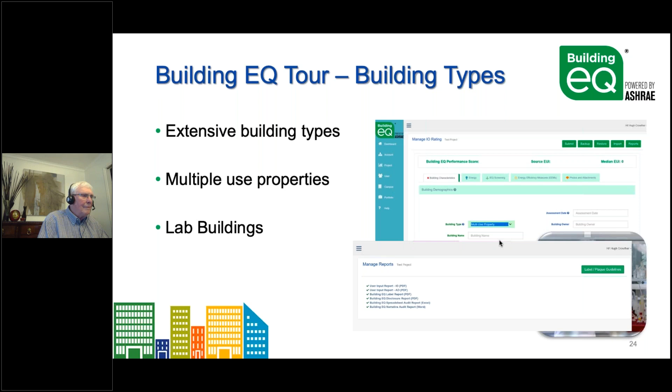Management reports generated by the Building EQ tool include a label report, a disclosure report, a spreadsheet audit report, and a narrative audit report.

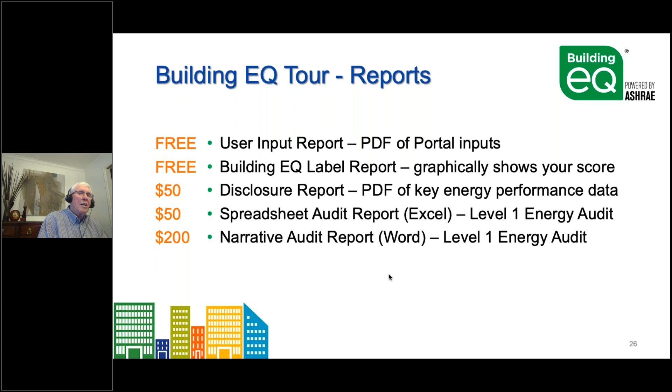The Building EQ reports for credentialed users' submissions include a label report, which is free at any time; a disclosure report for a $50 fee; a spreadsheet audit report also for a $50 fee; and a narrative audit report for a $200 fee.

The Building EQ Label Report is a graphic presentation of the Building EQ Performance Score and is free to credentialed users for approved submission. It can be used to create a building plaque. The calculated Building EQ Performance Score is visible at the top of the portal page at all times.

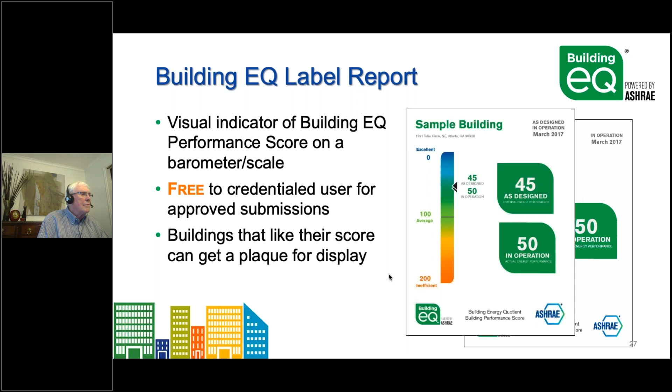The Building EQ Performance Score provides an indicator of how the building is performing, with additional information produced during the assessment. This allows for a conversation with the building owner on how to improve the building's energy performance.

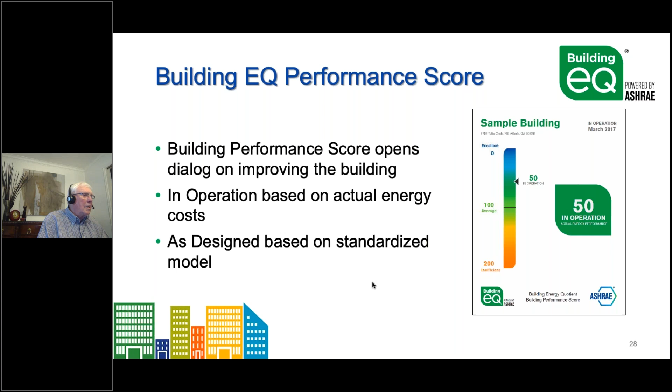The in-operation assessment is based on actual energy costs, resonates with decision makers, and provides actionable recommendations for improvement. The as-designed evaluation is based on a standardized model of the building, provides additional information for decision makers, and indicates the building's potential energy performance.

The Building Disclosure Report presents a summary of the building's energy use and Building EQ Performance Score. It provides energy use information for compliance with disclosure ordinances in various locales, and is suitable for real estate transactions and energy disclosure.

Information on a building's energy use is the critical first step in making the necessary changes and choices to reduce energy use and costs. The Building EQ In-Operation Assessment process focuses on the building's metered energy use for the preceding 12 to 18 months.

It includes a collection of information that aligns with an ASHRAE Level 1 energy audit, helps in the preparation of an ASHRAE Level 1 energy audit report, and provides building owners with building-specific energy savings measures with estimated costs and payback information that can be used to improve the building's energy performance.

ASHRAE 211 includes a normative language standard for energy audits, a consistent approach to these audits, and raises and maintains the bar for energy audits.

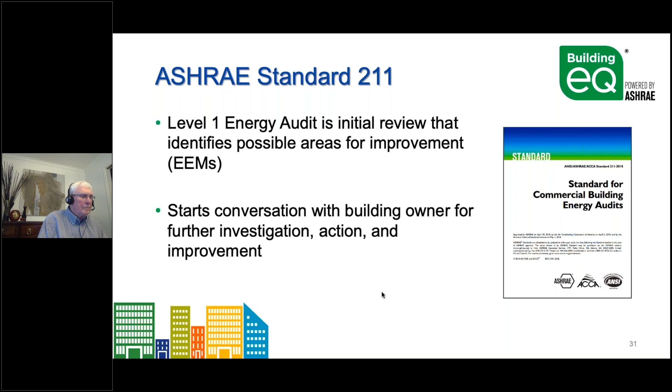The Building EQ Narrative Audit Report includes a template for an ASHRAE Level 1 Energy Audit Report in MS Word format, meeting ASHRAE Standard 211 reporting requirements. It is auto-populated with all the information collected during an in-operation assessment, and additional information is entered by the user.

Specific ways this report is made useful include providing recommended text and boilerplate language to assist the user in preparing a comprehensive Level 1 energy audit report. It has audit-specific information populated from the Building EQ portal that fills in the tables in the report. The MS Word format can be edited as needed, and users can add or delete information based on what they wish to include. It can also be customized by adding appropriate letterhead or logos.

In summary, Building EQ performs both in-operation and as-design ratings, which help make bad buildings good and good buildings great. These tools are flexible for managing large portfolios of buildings and users, and they align with ASHRAE Standard 211 Level 1 energy audits, making it easy to deliver both a benchmark and an energy audit, and allowing for consistent benchmarking and audit formats.

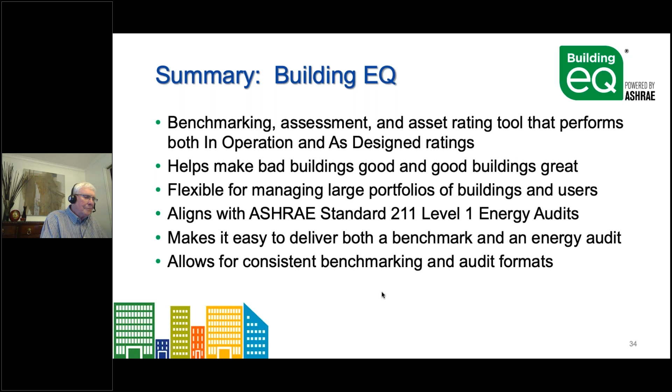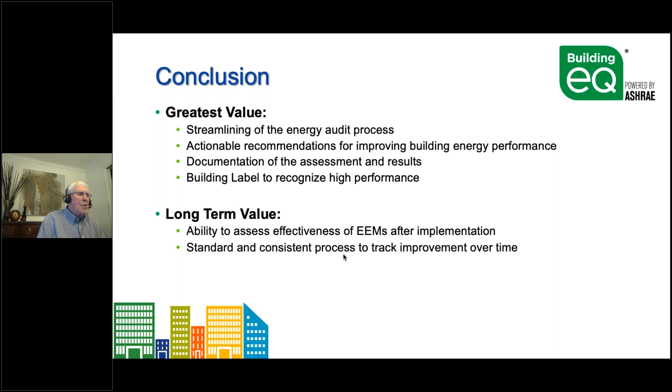Access the Building EQ portal at ASHRAE.org, and questions can also be sent to Building EQ at ASHRAE.org. Check it all out. The last slide has information to get in touch with me.

If you've got any questions, please feel free to contact me at this email address. I'd be very happy to answer any questions people may have, or if we've got time now, I'll take some questions. Thank you very much.